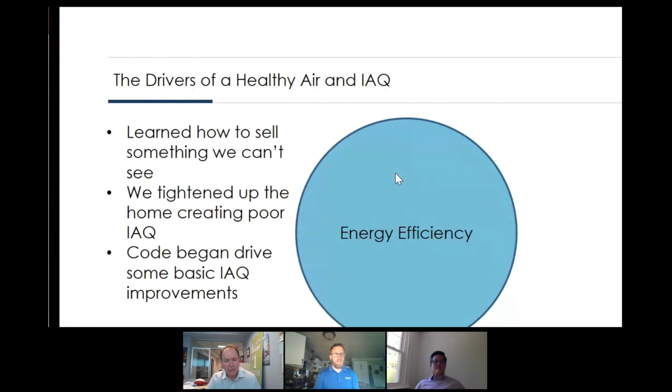Because of that, code began to recognize the importance mainly of ventilation. For the most part, that's what was driven from an IAQ standpoint as a result of energy efficiency. So that's kind of part one.

Part two, I think smart home helped pave the way in a huge way. For one thing, smart home technology has connected us to the mechanical systems and the home buyer to a mechanical system in a way they're more comfortable with, as opposed to just going to a thermostat on the wall when you feel like changing the temperature, or walking by this equipment when it's down in the basement or up in the attic. Now, if it's on your mobile device and you're receiving alerts and have some drivability and the ability to control it, you're seeing these attributes, IAQ and HVAC, all the time.

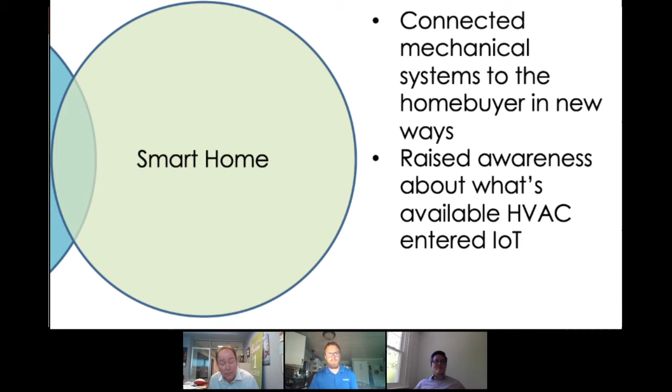And HVAC itself - a lot of awareness was raised as we entered this sort of IoT with smart thermostats. Aprilaire, of course, has some with IAQ Control, Nest - all those products really brought HVAC to the forefront of IoT and as something people wanted to control through smart home technology. And then last, certainly not least, and probably most obvious, is just that health and wellness in general has become a huge industry.

People want to control their health, and they want to control it with tech. Wearable technology has taken off. People are much more in tune with their health and what they can do about it, and they're taking a much more proactive approach, one that typically starts on the personal level, at home.

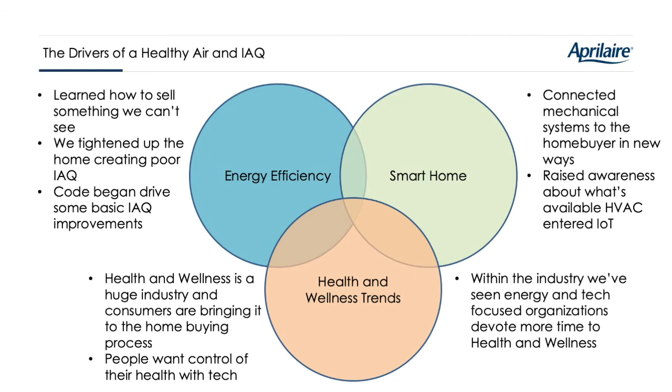It's not necessarily about making more doctor appointments, but about monitoring and being proactive about your health in your own space. Within the industry, we've seen energy and tech focused organizations move towards health and wellness. If you've attended EEBA, RESNET, or IBS, you've seen more and more tracks about health and wellness these past couple years, from organizations that traditionally specialized in energy efficiency. So we're seeing it bubble up on both the industry side and the consumer side.

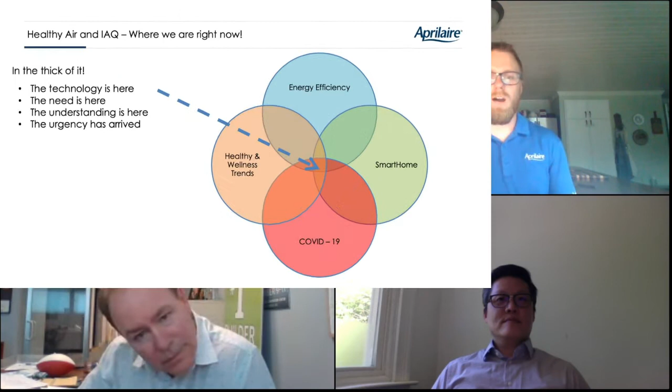So where are we right now? Well, when you add in COVID-19, we are absolutely in the thick of it. I don't think the demand for healthy home is ever going to get bigger than it is right now. The technology is here, the need's been here, but it's more obvious now. The understanding is here by manufacturers, builders, and consumers, and the urgency has arrived.

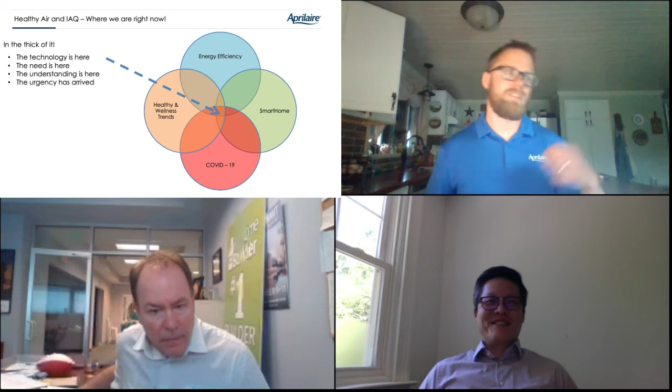You've got almost everyone at home acting like an armchair epidemiologist. They know so much about virus transmission—does it come through the air—and about N95 and the different filtration types, the benefits of a mask, breathing in and breathing out. It's gotten to a point where it's on everybody's mind.

So we can strike while the iron is hot by offering these solutions, because now within the home you can really make a difference in somebody's health—with the typical things we always addressed, like asthma and allergy, but now we're seeing a shift more towards virus control, at least currently, and I think that'll probably continue as we go on.

So these solutions have always been there, but different parts of them have been highlighted at different times. IAQ products do help with energy efficiency. There are smart technologies within IAQ. Health and wellness has always been there, but now COVID-19 has helped tie all this together and made it something that probably just about all your home buyers are going to ask about to some extent.

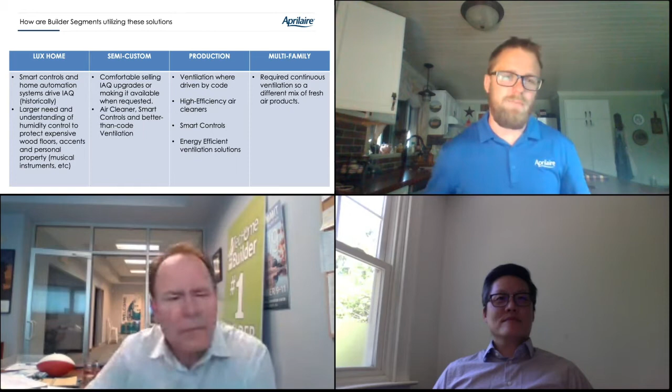So I don't want to make generalities about the individual segments, but traditionally, as far as engaging with IAQ, the luxury home market—as with most technology—has an easier time introducing it to consumers because they're not as hung up on price. These are typically fully custom homes, so there's more chance to talk about it, spend more time on the benefits. They may even bring it up themselves, and then you're just including it.

There's also a larger need for some of the other aspects of IAQ—humidity control is important to health, but it's also important for protecting wood floors, accents, and musical instruments. As you get into these higher end homes, people have assets they want to protect, so there's been that part of it that's been there for a long time: controlling moisture in the air and in the home.

Semi-custom builders, similarly, are a little more comfortable selling those upgrades. They might be a regional or smaller builder, looking for a differentiator, and they're not quite as cost driven, so they're able to deliver this. Thrive Home in Denver is a great example that comes to mind—they've done a great job taking the message, standardizing on healthy home products, and really making that part of the home they sell, bringing what's in the mechanicals to the forefront of the home.

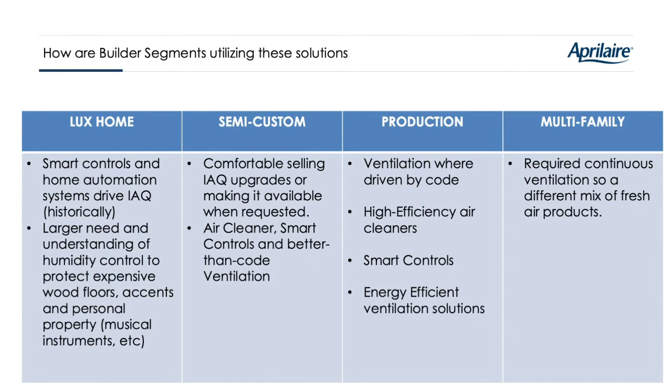Production builders—this group's going to vary the most as far as what products they use. Ventilation is going to be your most common IAQ product, simply because it's driven by code in most areas. Exactly which ventilation solution they have will also be driven by code, but that could also be driven by energy goals as well as any other health benefits they want to claim. High efficiency air cleaners are getting much more popular in the production home building market. Smart controls are almost standard now in many production homes, certainly as you get to the more mid-grade price points, and energy efficient ventilation solutions would be coming in to meet those energy goals.

So whether that's an ERV or an intelligent supply solution, you've got that end of it as well. Multifamily, this is probably where I'm least versed. Michael, I know you've talked a lot about health and wellness in the multifamily arena, so maybe you could add to this when you're up.

But from a ventilation standpoint, they do require slightly different equipment. There's continuous ventilation, so there's a different mix of products. For the most part, anything available in these other segments, multifamily can obtain. There are some obstacles in that in a multifamily situation, you may be installing in a smaller mechanical closet or some type of fur down or chase. But the good thing is, like all IAQ technology, it's getting smaller, more streamlined, and there's ever growing applications for this.

Just this year, Aprilaire came out with a return filter grill. So we now have our media on return grills, which is more common in multifamily applications. As these become more standard, you'll start to see growing applications where these can be applied in multifamily production, semi-luxury.

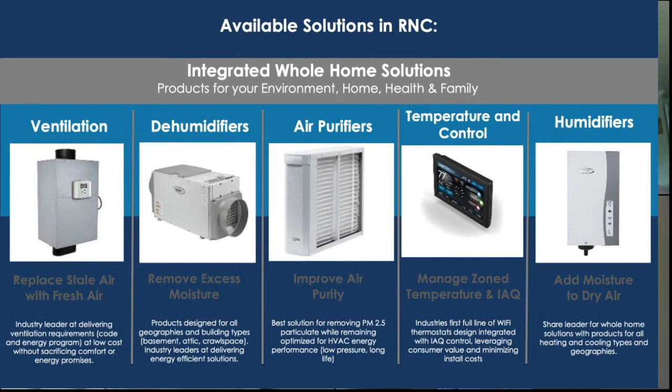Hey Joseph, for those of us who don't live in the air world all the time, we all breathe air all the time, but stale versus fresh, is that basically about carbon dioxide versus oxygen content, or what is it?

That's probably kind of the least defined. I think it's really all of them. I mean, it's VOCs, so that might be carbon dioxide, it might be formaldehyde, off-gassing from different building materials. To some extent, it's radon, although that's typically mitigated very specifically with radon solutions. But really, anything that builds up in the home as a consequence of living in it would kind of be stale air. So if you want to separate air purifiers from ventilation, I think the easiest way is to say air purification is more of the particulate matter, so the pollen, virus particles per se, whereas ventilation is going to handle more of the gaseous type stuff.

And what does stale air do to my body and my brain? Does it make me duller? Does it make me more lethargic? Does it sap my energy for life? What's the physiological effect on me?

It does all of those things, depending on what the chemical is that's building up. I mean, it can be as hazardous as increasing your chances of cancer, cardiac disease, and respiratory disease. I think just stale air in general, if you're talking about a house that's not real refreshed, you're certainly going to notice a large increase in odors. You're going to have more mold from humidity issues, because we create a lot of water as we live in our house in the day, as we add a lot of moisture to the air through showers and cooking.

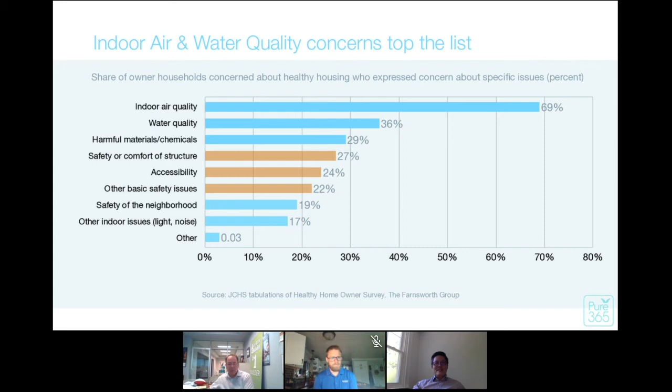This is a study from Harvard's Joint Center for Housing Studies from last year, pre-COVID, but overwhelmingly IAQ and water quality have always been at the top of people's concerns, which is why we're tackling these two issues here. A lot of people don't realize that in the same way IAQ was the number one health risk by the WHO—causing almost 10 million premature deaths from indoor and outdoor pollution—we are also in a water crisis, and most people don't know about it. So I want to touch on a few things that'll help people understand how serious our water quality issue is.

Okay, just a few things here. Over a lifetime of exposure to carcinogenic contaminants in drinking tap water, we would expect 100,000 cancer cases in the US. That's from a study last year.

8 million tons of plastics enter our oceans on top of 150 million tons that already circulate, impacting close to 700 ocean species. An equivalent of 1 dump truck is going into the oceans every day, every hour.

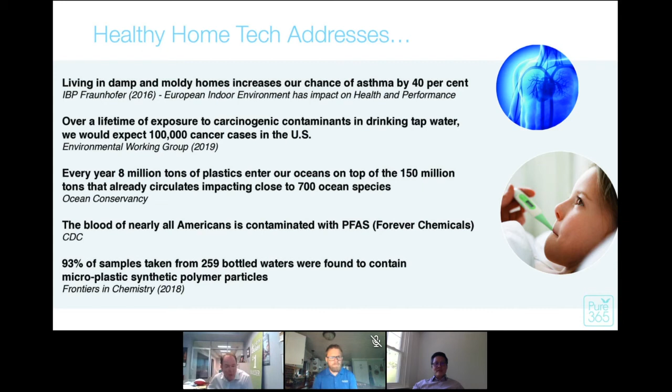It's staggering. One more here. The blood of nearly all Americans is contaminated with PFAS, which is nicknamed forever chemicals. I'll go into a little more detail later. But we are in a serious water quality crisis, and it's something that most people don't know about.

So why is it dangerous to just drink water from the tap? You have all of these contaminants in it, and you can see the list here: microplastics, chemicals, pharmaceuticals. I guarantee, John, Joseph, if you had a cup of water there and I said I had a little packet here of microplastics, chemicals, and I just poured it into your water and I said, I'll give you $100 to drink that, would you drink it?

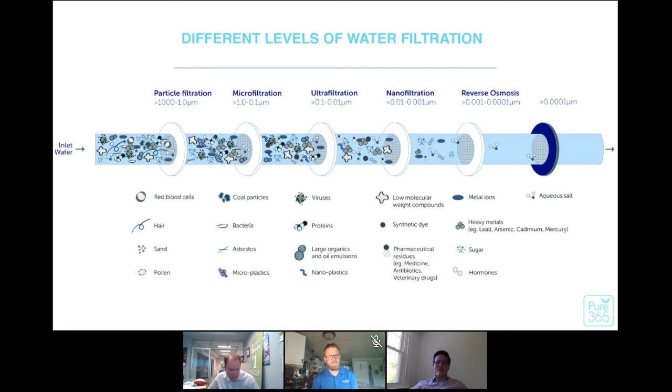Whenever we talk about whole house air filtration, the biggest impact is a whole house air filtration as close to MERV 16 as possible. Because of the amount of air your HVAC system is moving, you're looking at 2,000 CFMs even, you're going to get rapid filtration of the ambient air. The standalone units are just to supplement it. That's a really great point, Joe. When we talk to people about it, we always recommend the first choice is a whole house system, and then you supplement it with standalones in the areas where you spend the most time.

And what kind of costs are we looking at there? The retail on the base unit is about $1,000. The middle one is about $2,500. And if you want a whole house system, with all your softeners and other water treatment plus RO for the whole house, that's $5,000 retail. But if you have nothing in your house, what we usually do is get a water test. We test 29 parameters and customize a full water system for the house and where it's located. Like Joe says, air and water are the same, every region is different. So you've got to get the water test, study it, and then customize it for that house.

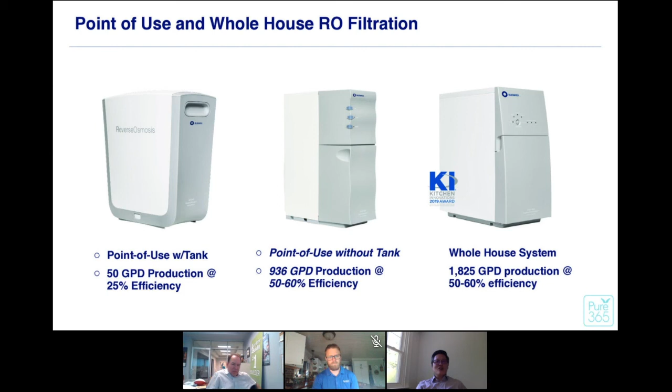Can I taste the difference? A lot of people say they can taste the difference, but it also depends where you live. If you have more polluted water, you're going to taste the difference more. But it all depends on the state of your water pre and post.

So this is what a whole house system looks like. That RO unit is the one in the middle, and then you have a pre unit and a post unit. You have a neutralizer, a water softener, a pump, and a tank. It's pretty extensive because we base it all off of your water test, based off of your 29 parameter results.

And if I've got a whole home system, I'm bathing in pure water. Right? I love it when I take a shower because I know it's better than bottled water quality. Most people don't know, but when you take a shower, your armpits and your face absorb close to 100% of the contaminants in the water. So if your water has lead or pharmaceuticals in it, your face and armpits are actually absorbing all of that. It's really important to have clean water.

So if you cannot afford a whole house system like this, at least get a shower filter that's going to reduce some of those contaminants.

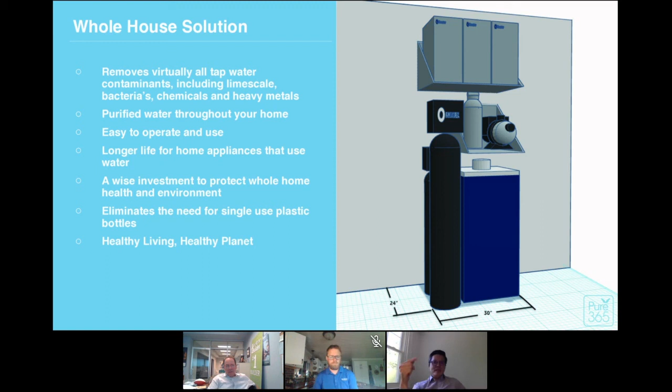I tried to keep it short on water, but I just wanted to reiterate again, builders: now is the perfect time to set a strategy with all of your projects to make the entry level a standard, no matter what the price point on your house is, and have those better and best options.

Michael, we have a little more time. Talk a little bit more about some of these categories beyond air quality and water quality. What do you think is cool about them, why they're important, why builders should consider them. Can you give us a quick rundown? Sure, for sure.

So, studies show indoor air quality and water quality are at the top, but what's gaining traction in the healthy home tech category right now is circadian lighting and biophilic design. Circadian lighting is really important because our body works off of the circadian clock inside our bodies based on the sun.

Before electric light, which I call fake light, the real light is sunlight. People went to bed when it got dark and woke up when the sun came out. They were very healthy when it came to their circadian health. Obviously they had to deal with other types of diseases and pathogens, but they were much more healthy circadian-wise than we are today.